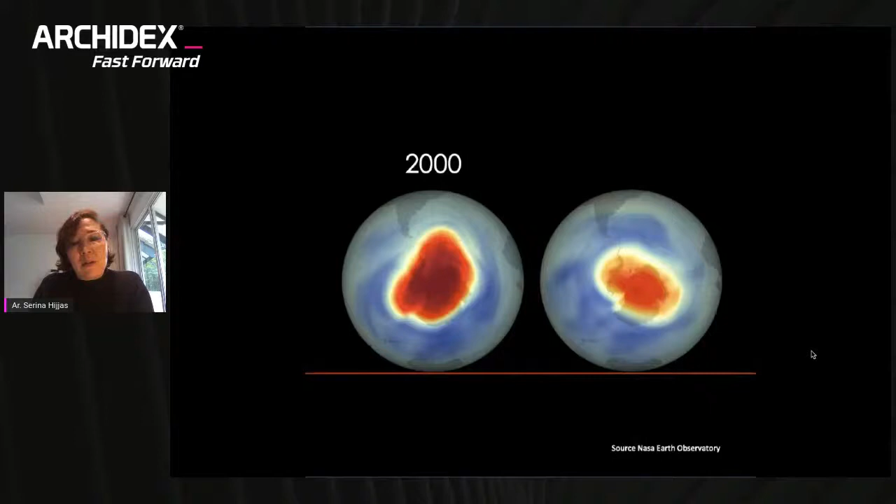I bring these two figures out - an unusual one. Some of you may know that from NASA, from landing on the moon and having satellites orbit around the Earth, we're able to basically monitor the changes happening on Earth. In 2000, they measured that the ozone layer was depleting, creating a hole in the South Pole. What you see on the left is the year 2000.

And what you see on the right is that the ozone hole has reduced, and it only reduced because in 1987 the United Nations introduced something called the Montreal Protocol that banned CFCs and fluorocarbons into the atmosphere. But it's taken us something like 30 years to reduce the ozone hole by about 20%, even from banning CFCs and fluorocarbons. It's estimated that we won't recover till the year 2040.

I bring that up to you because whatever actions we take now will not be immediate. It will take years before we can reverse whatever is happening to climate change and the planet as we sit here. We are already approaching the 1.5 degree limit, and we will see these repercussions through coastal flooding, urban heat island effects, and everything on the planet, including biodiversity depletion, which is already happening.

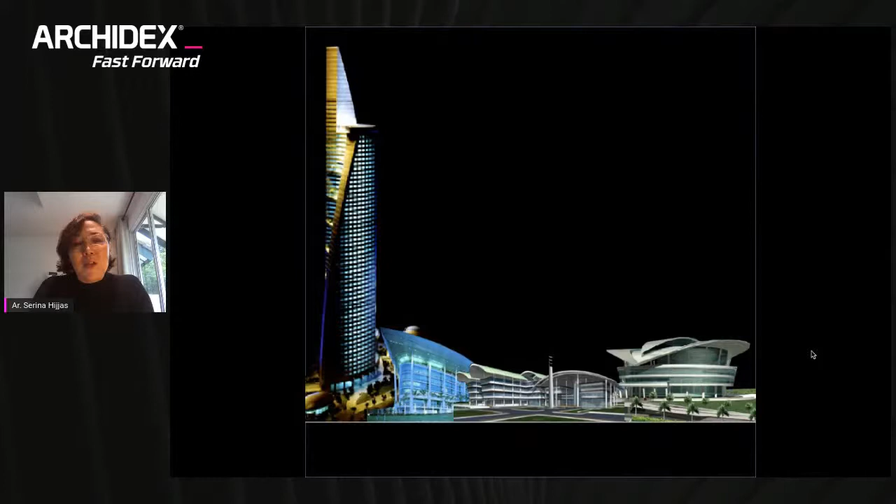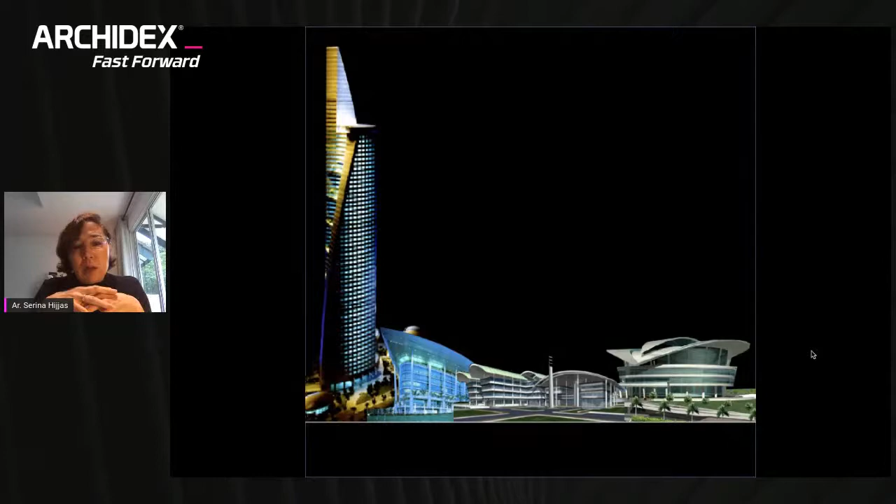So this was one of my first projects, the Menara Telekom. It was the first idea to bring sky gardens to buildings, because I came back with this idea of green buildings already some 30 years ago when I first started. That started a conversation of a series of different buildings - you may see they are similar in form, all curvaceous, from the Telecom building to Securities Commission to Ericsson to the Convention Center. In the lower buildings, they have this sort of big umbrella roof. They were about identity, about environment, and about ways of looking and transparency.

Since then, the buildings I've been involved in have moved and shifted with a lot of the same ideas and themes seen in all these buildings. And the ideas generated in a lot of these buildings - a lot of people will say Hijjas is all about forms.

Hijjas buildings are not just about forms. There's a lot of content inside the buildings and a lot of ideas that you will see later on. But one of the distinct things we like to have in our buildings is a strong silhouette of the building. Because in a strong silhouette, people retain the idea of what this building is about, and that memory is a strong icon in itself.

And it's not about big buildings necessarily. But when you look at a Hijjas building, there is a lot more layering in the ideas that come into play that you don't see. There is a climatic response, there's identity, there's material, there's daylight harvesting, there's energies, there's transparency. Some buildings where we can introduce passive design. There is a scientific approach in some ways to the building facade, but a lot of them are in response to people and place.

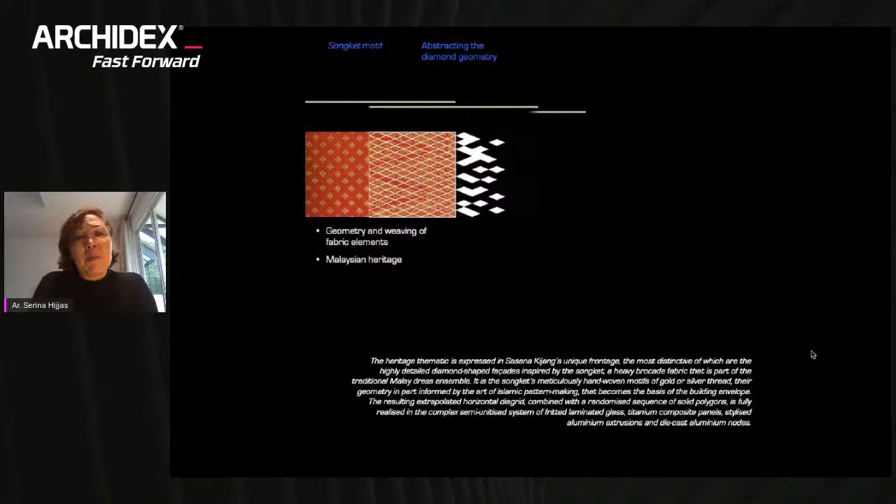The second idea and element inside this building was derived from the heritage of the Kain Songket. The geometry and weaving of the fabric was abstracted into pixelation and diamond geometry, wrapped around the whole building in a series of stone, glass, and even titanium. It's the only building in Malaysia that has titanium on it, which is actually on the museum side.

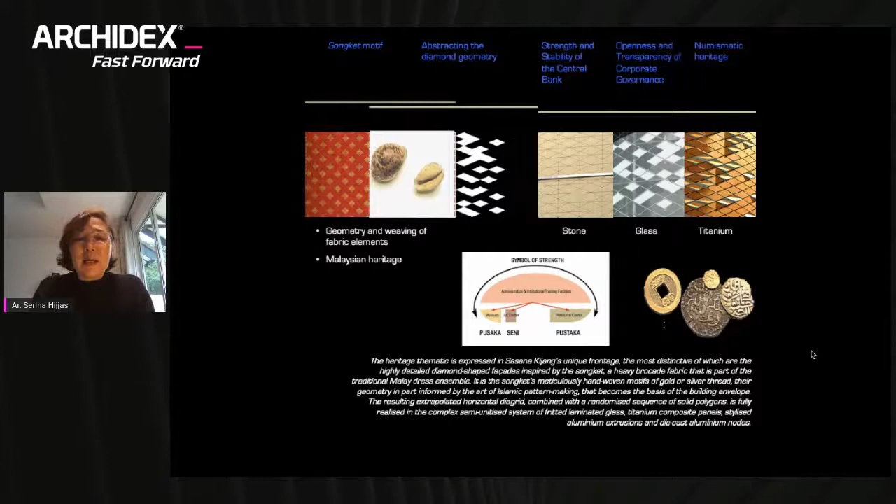This was one of the most complex buildings we've ever actually built. Not many people know that there's 2 million square feet of built up building in this. It's almost two-thirds the height of the Petronas Towers, but done horizontally. It has more than 1,000 car parks submerged underneath the building.

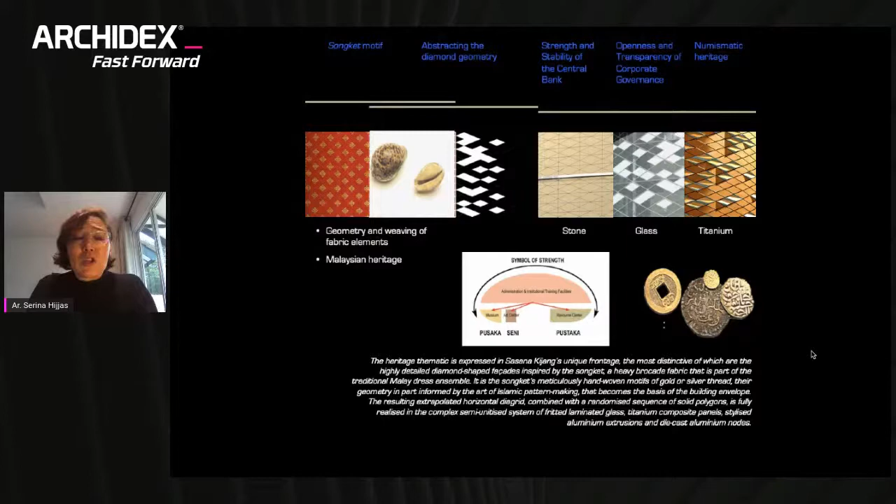What we wanted to give was a sense of lightness and pavilion. The front buildings are a series of three pavilions, Pusaka, Seni, and Pustaka, because of the function of the buildings inside. This is a view of the building. I've got to say that when I said it was the most complex building, it looks rather simple.

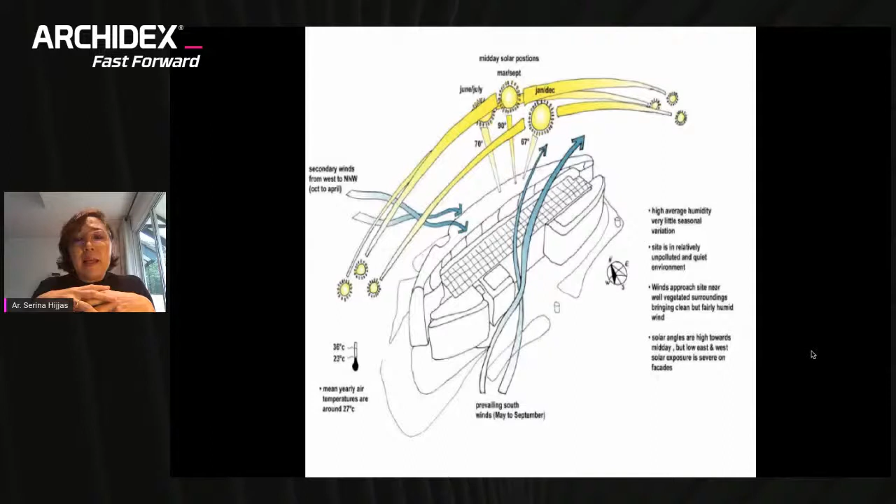But right at the beginning, we looked at the environmental aspects of it and how we brought daylight into the atrium spaces, how we responded to north-south. The building is predominantly north-south, and heat gain is mostly in the east and west. How we wanted to bring light in was also very important. But at the human scale, it wanted to appear very low-rise and approachable.

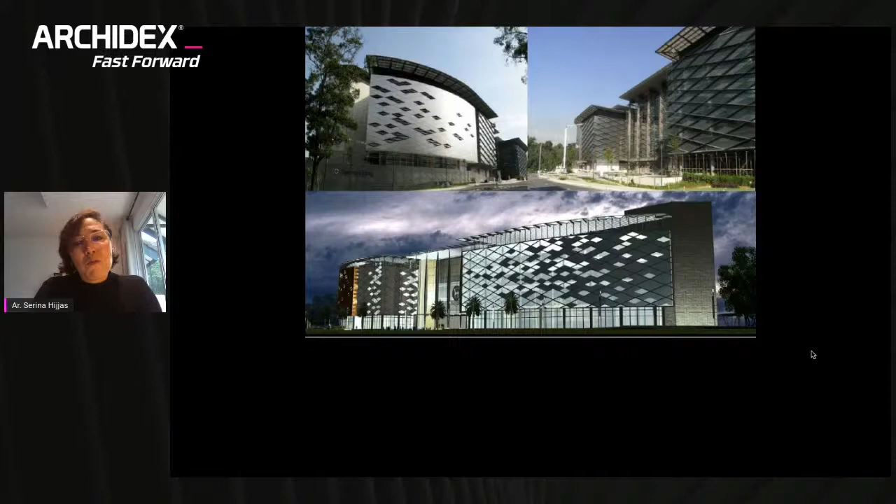The building, whilst it has different components, responds by wrapping a building fabric that is contiguous around, but in the details are quite different. There were more than 22 types of facades on this building. As I said, it was one of the most complex buildings that we had done.

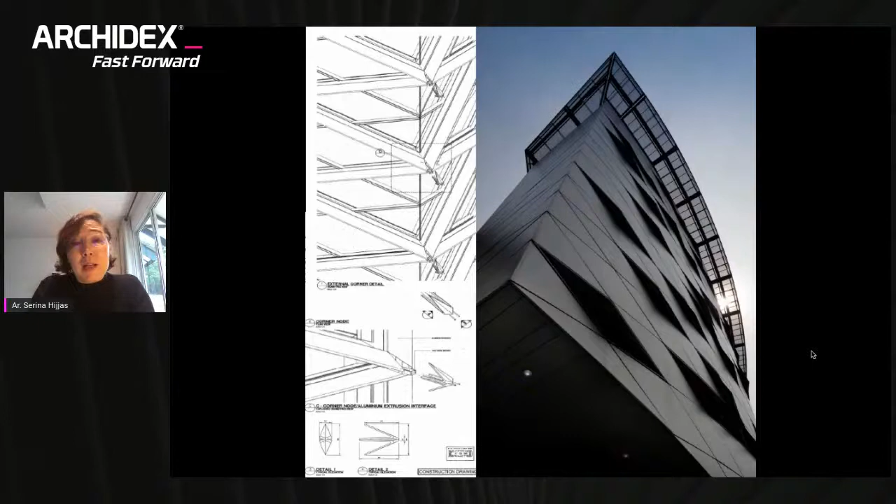From the eyelids onward, whenever we do a design, whatever research you do influences the work that you do later on. So this diamond facade appears again in the tower of 4G11 in Putrajaya, as eyelids on the building. And the Songket also appears in the boulevard of Putrajaya, also done by us, a 3-kilometer landscape planning of the boulevard with a matrix of diamond grids. It was probably something we were very fascinated about, and we adopted it into the building and created something that was quite unique but responsive in the facade.

Often, when we start a competition or an idea, we look at it in a very holistic way, and we also work together with engineers, both MEP and structure, simultaneously. We work in a more collaborative way to get the best out of them, and also generate ideas together with them.

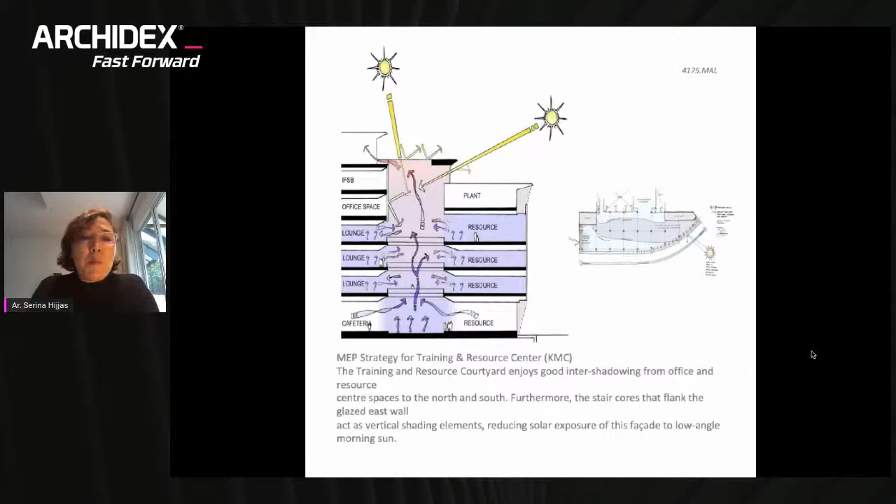So you can see the way the air system works inside this building. As I was mentioning, from the outside you don't understand the layering and the complexity of the building, but there is a whole series of ideas generated inside.

One of them was this continuous Nautilus staircase which spirals up the building. We wanted something dynamic, so as you're at the base looking up, the experience of going into the museum probably came from a memory of the IM Pei building at the Louvre, where there's a huge spiral staircase bringing you from ground to lower ground. But in this case, it's a continuous opening up of a spiral that goes up to the top.

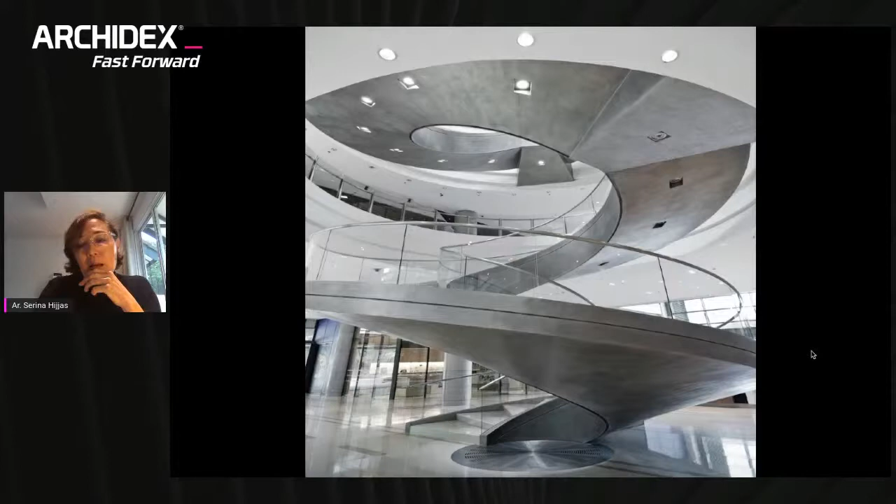So it is not a constant spiral, it's a Nautilus staircase which actually gets bigger and bigger as it goes up to the top. Complex as it is, it looks continuous because we used pewter render onto the building, a special finish because we wanted it to feel Malaysian. That's why you see pewter used for the first time on this spiral staircase going up.

Another interesting building for us, evoking ideas of portability, was the Malaysian Pavilion. It was the first time the Malaysian Pavilion at Expo did not represent a Minangkabau roof. It was a shift, an idea that broke the normal rule, because in all the other expos Malaysia was represented it was always this cultural building that looked like a Minangkabau. In this case, we explored something completely different.

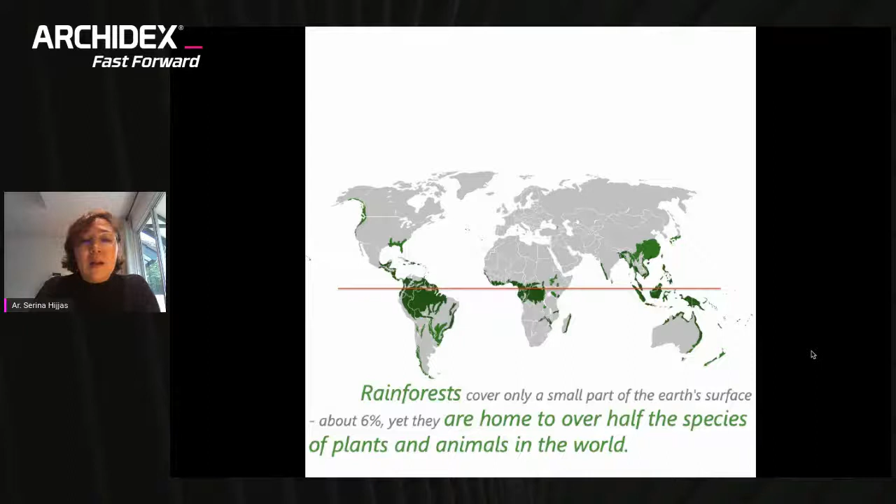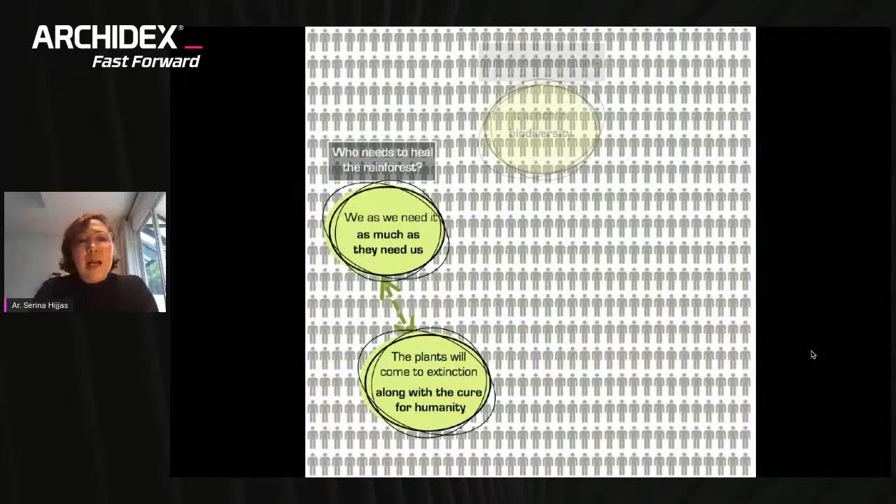So the idea for the pavilion was the seeds from the rainforest as a metaphor, and they were built using timber. The idea was to exemplify the biodiversity and the uniqueness of Malaysia's biodiversity to the world, both for medicinal value at the humanity level and at the biodiversity level. From the humble rice seeds we took this inspiration and translated it into a pavilion, meant to be an experience quite different from normal buildings.

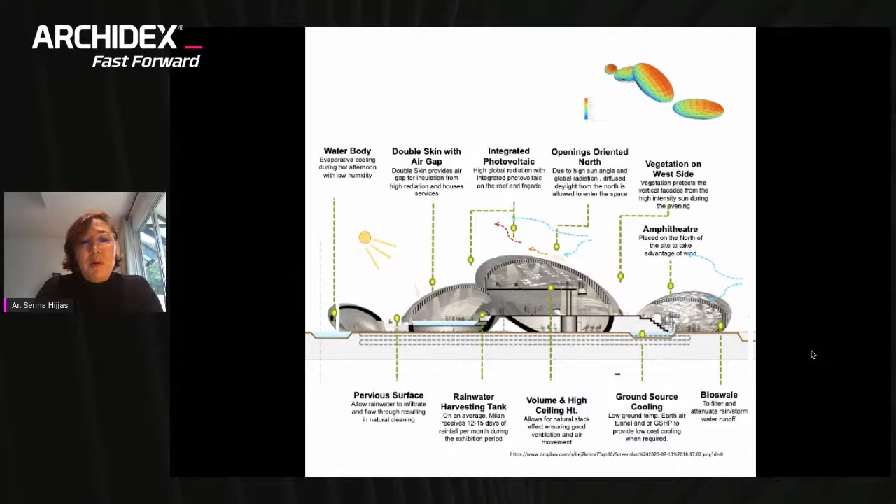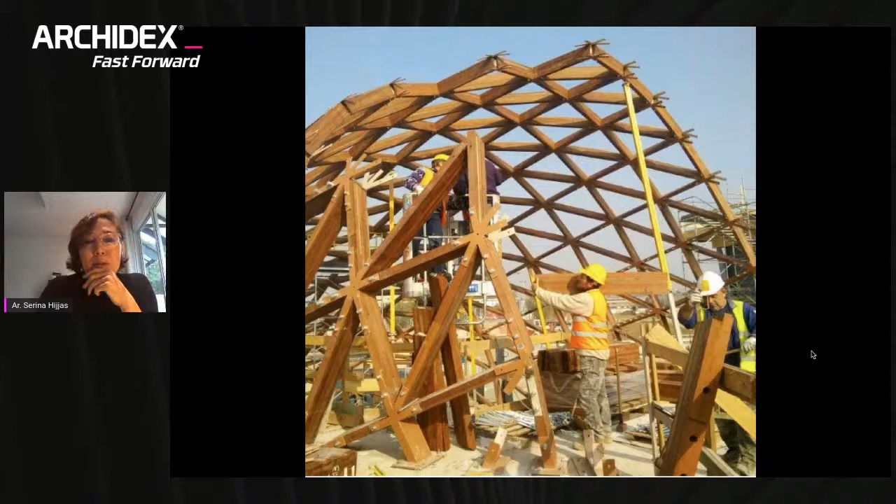At the same time, we looked at the whole sustainability component, from ground source cooling to water collection to the skin of the fabric of the building. It was a very interesting experience because all of these timbers were manufactured in Johor and then assembled by Italians in Italy, making for a very interesting glulam story in terms of building.

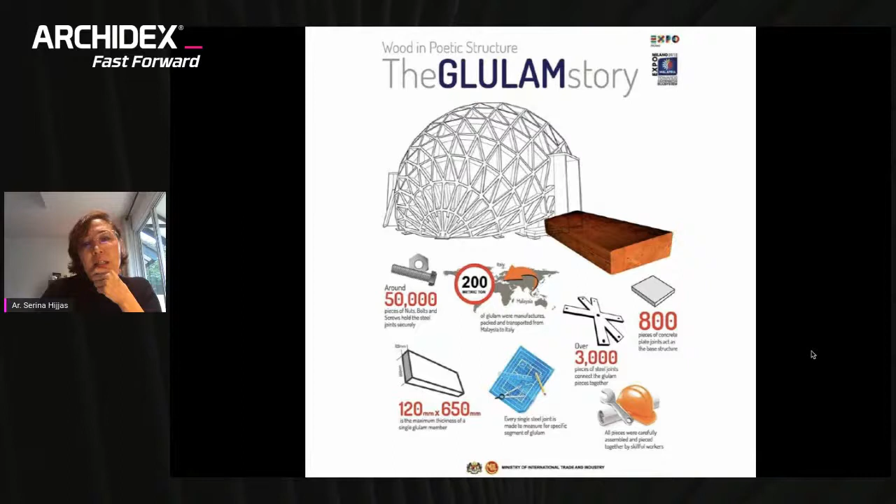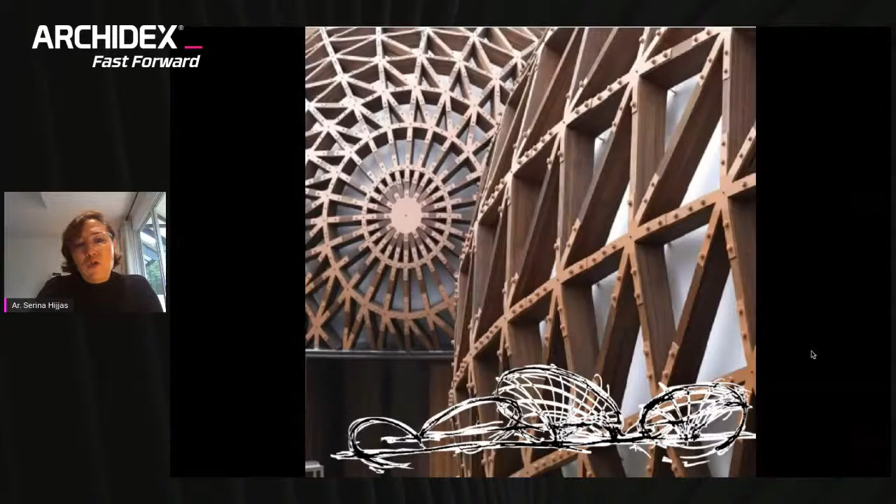I think this was our exploration of trying to showcase the best of Malaysia, both in terms of the richness of that biodiversity and in terms of the materiality. It was one of the best pavilions at Expo, and it really became an inspiration to Malaysia itself—showing that even though we're a small country, we certainly have a lot of interesting ideas.

Both these pavilions were actually competitions, so we were very fortunate to enter the second pavilion, the Malaysian Pavilion. Pavilions are very interesting for us because museums and pavilions are the only typologies of buildings that allow you to express something unique.

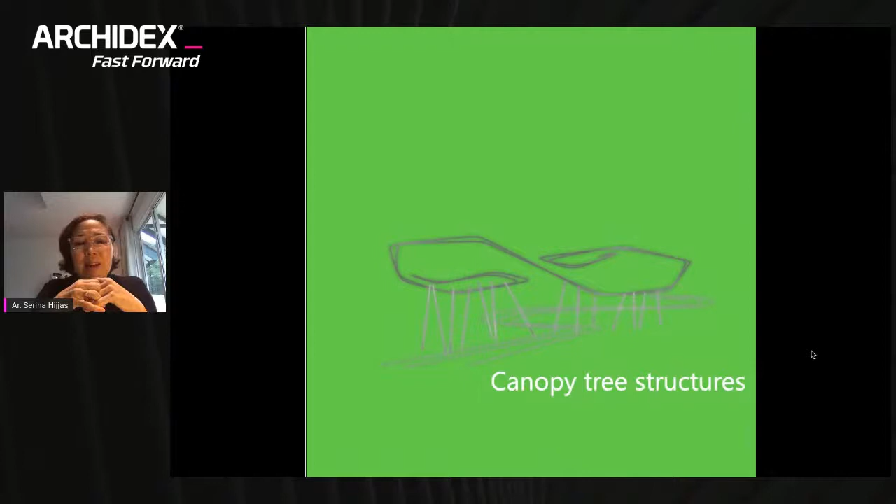You're not going to get that necessarily with housing or definitely office buildings—there are different types of responses you need to take. For the pavilion at Expo 2020, it's still going to be called Expo 2020 but will be held next year instead because of the global pandemic.

We came with a totally different idea in the competition. So all that you see here was actually our competition submission right at the beginning, very, very comprehensive, but again trying to do something that was unique.

In this, we call it the canopy of trees concept, creating tree structures as a Malaysian pavilion. I remember when I went to Italy and they asked where I was from. I said we're from Malaysia, and they said, oh yeah, we've seen the cartoon animation Sandokan, people live in trees, above the ground on stilts. I said I don't know this animation, and it turns out it's an Italian animation about the Malaysian jungle and way of life. So it was very ironic.

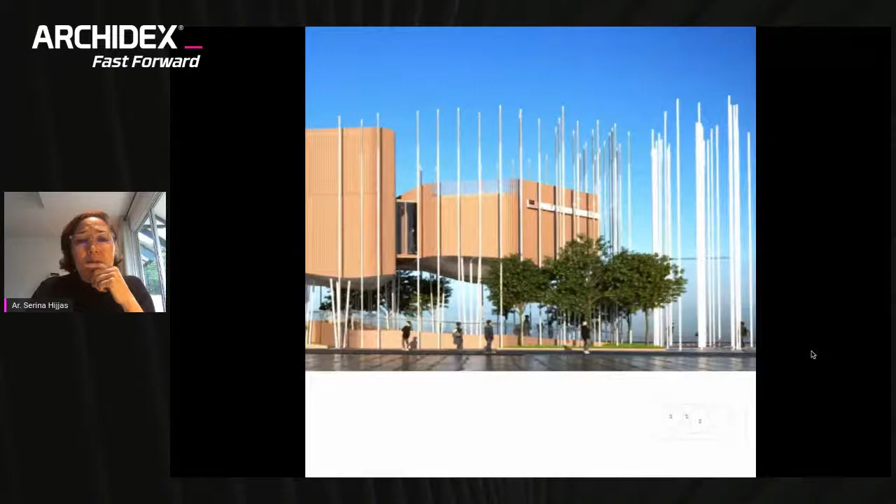That stayed in my mind, that people's perception that we live on stilts. It's interesting because as we go forward, in the event of climate change, for those living by the water's edge, living on stilts may become the new norm, and we'll be reverting back to that. So in this pavilion, the Malaysian building on stilts made of natural materials was one of our inspirations. The experience of meandering through the landscape, unique to Malaysia in terms of our rivers, was an idea that seemed to resonate. This is the Malaysian Pavilion for Expo 2020.

The building is clad and built in steel and timber for sustainability. This will be the first carbon neutral pavilion at Expo, as much as we could do. The idea of the building is touching the ground lightly, so the experience of the groundscape is as important as the experience of the pavilion itself.

We developed this idea because we were getting a lot of criticism globally about palm oil and reforestation, and not many people know that Malaysia does a lot of reforestation and sustainable palm oil. We wanted to showcase that in some form, making a sort of political statement as much as a pavilion statement. So it's an integration, a lot of pavilions about an experience inside.

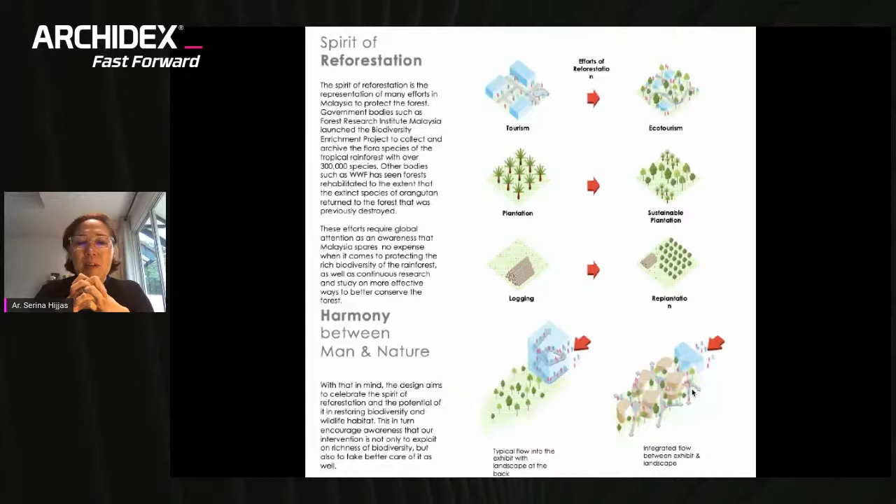Quite interesting, because the Singapore Pavilion, which is obviously going to be our competitor in the tropical belt, is also lifting off the ground, but theirs is a single platform pavilion, and the experience of walking up through there is also an experience, and inside it's actually quite green.

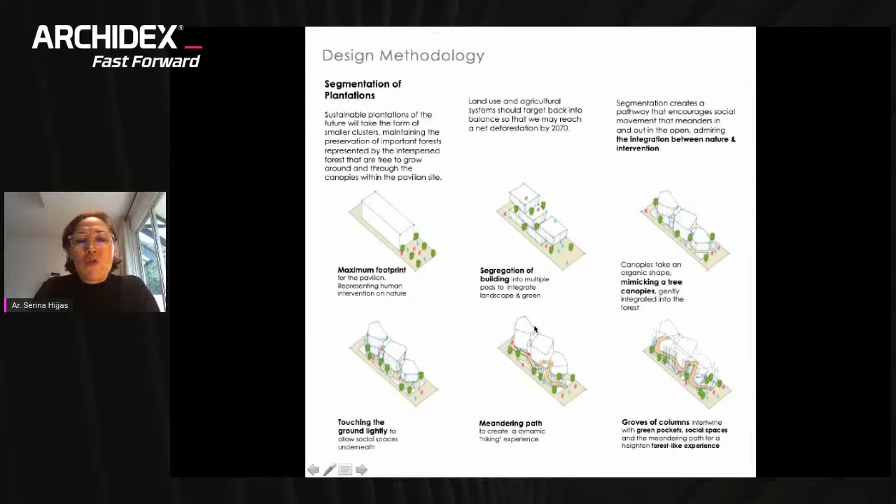So this was some of the design methodology: do we maximize the building on the land? Do we stack it up differently? Do we mimic the tree canopies? And how do we get the experience of a meandering path up the building as part of the whole pavilion experience? This is a section through the pavilion showing that the exhibition itself is above ground.

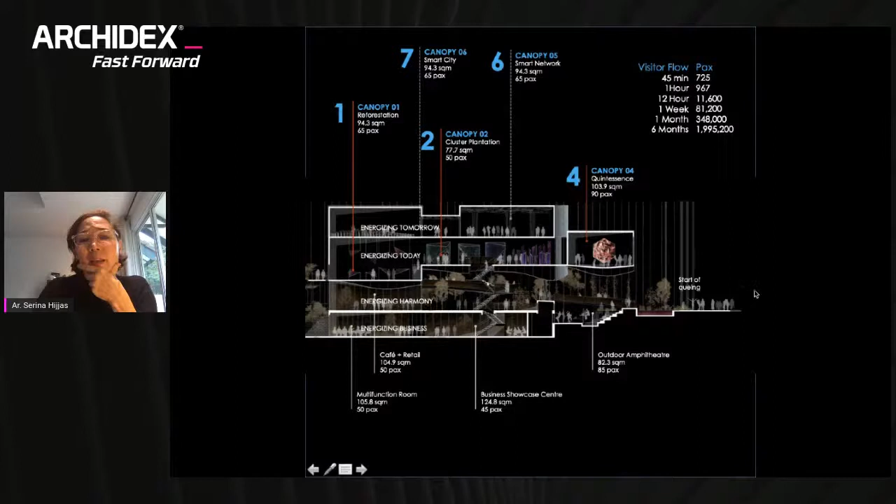Part of the below ground is also an outdoor experience, with eating areas, and the queuing experience and walking up the ramp is part of the entire experience. And then when you come in, what will that experience be?

As mentioned, it's going to be the first carbon neutral pavilion. We obviously maximize as much as possible on solar panels, but that only generates about 20% of the energy. So part of achieving carbon neutrality is that we are going to be growing and reforesting trees in Malaysia as part of the carbon exchange, because we're limited in the amount of space we can build.

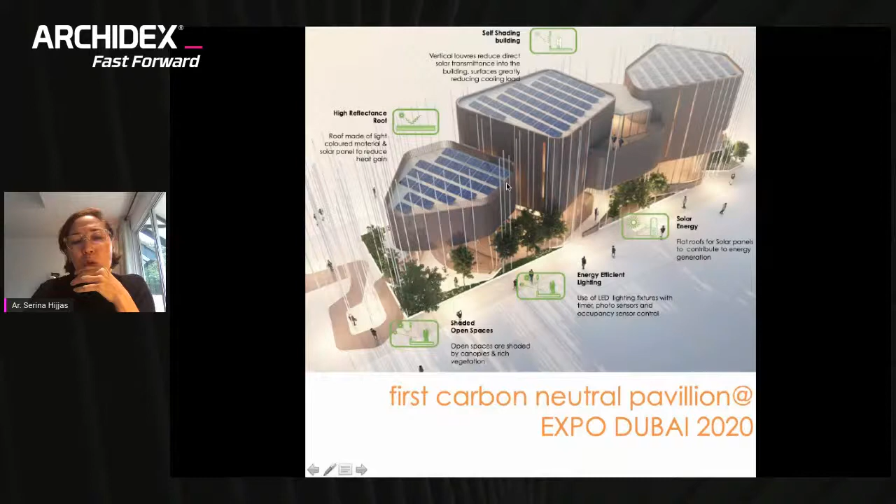So we've maxed out completely with regards to energy efficiency and solar. We also have heli fans to scoop air into the place. We've done as much as we could to optimize the building itself.

This is the experience of people, how they ramp up into what is the white box experience of the pavilion, into the black box experience of the pavilion.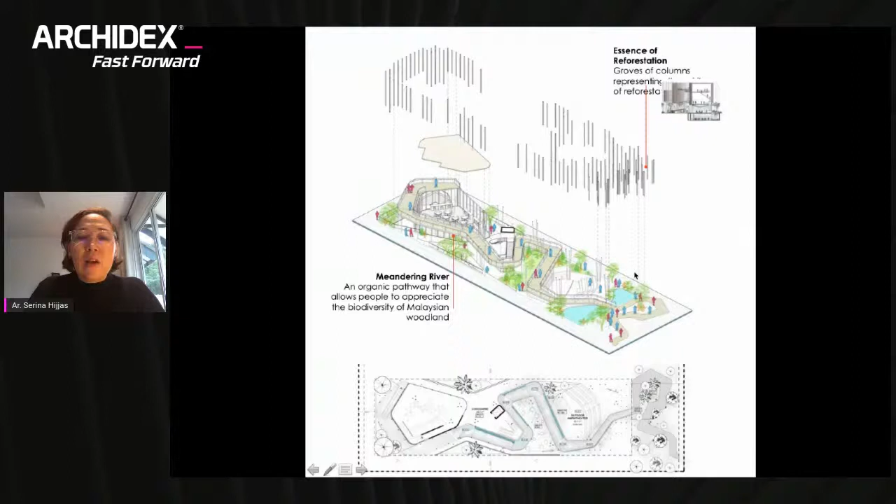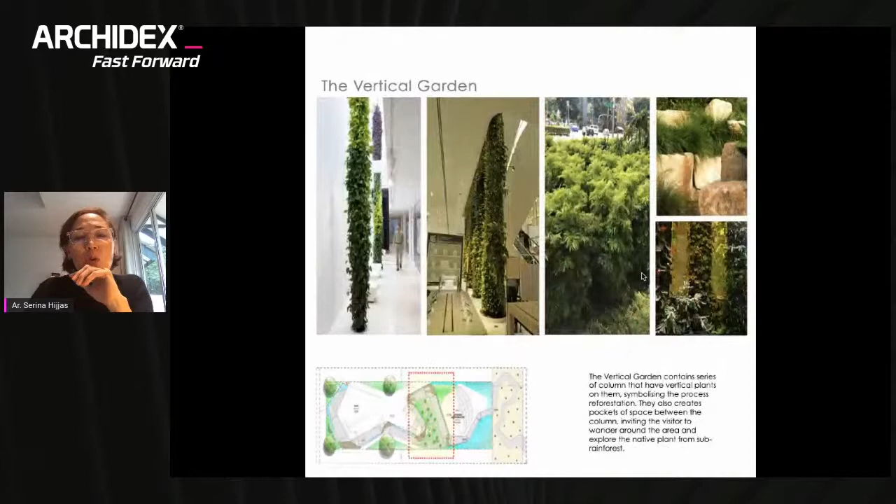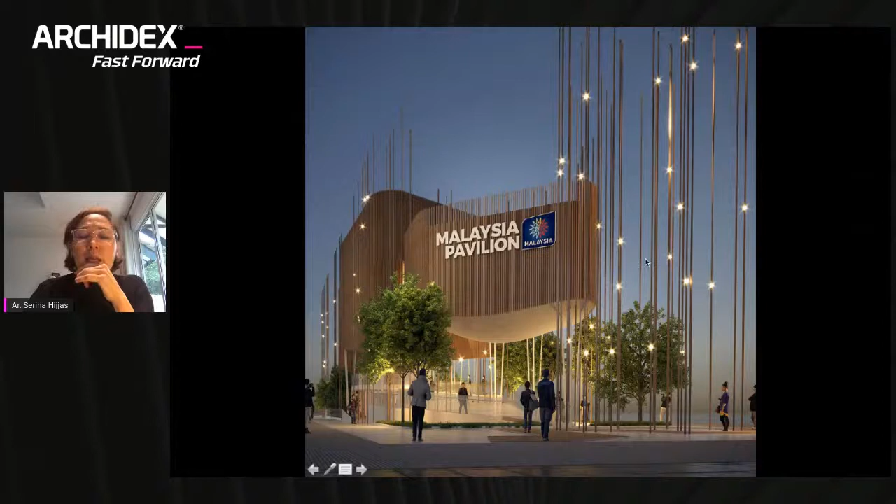And the columns that you see around the building — we've also introduced a water rill, so it's the sound of water running down the ramp into a water pool, with a series of vertical greens and courtyard greens to bring light down below. The poles that you see here will actually move a little bit because they rise quite tall, and the lights on them are a representation of fireflies, a symbolic representation within the pavilion landscape itself.

Not many people realize that daylight is free energy. It's something we enjoy in the tropical belt because we get 365 days of 12 hours of sunshine every day, apart from rain. This is quite different from living in London or New York, where daylight hours change between 7 and 3 and so on. So we're in a unique place to optimize that, while realizing what other ideas exist. This building about free energy is the new Celcom Tower.

I don't know if you remember before, some of these buildings used to have a Celcom building, the old Celcom building, which used to say 'Welcome to Celcom territory.' And they used Usain Bolt as one of their ads in terms of speed of connectivity, providing speed of connectivity to people. So Usain Bolt's ad came after the building.

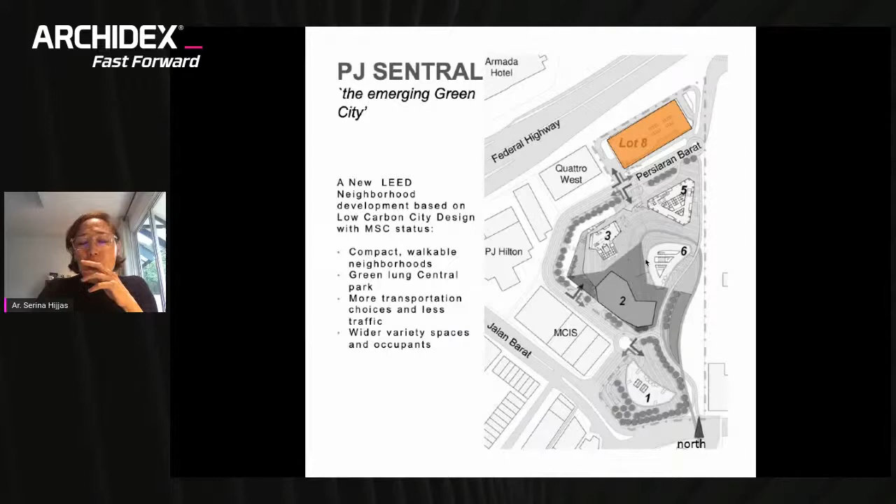But when we were developing the idea for Celcom Tower, this was before the co-working space came in, and we were looking at distributed work options, teleworkers, satellites, moves to mobility, change of use, where basically they don't work at their desk. So it was an emerging idea, but this is fully taken into this building.

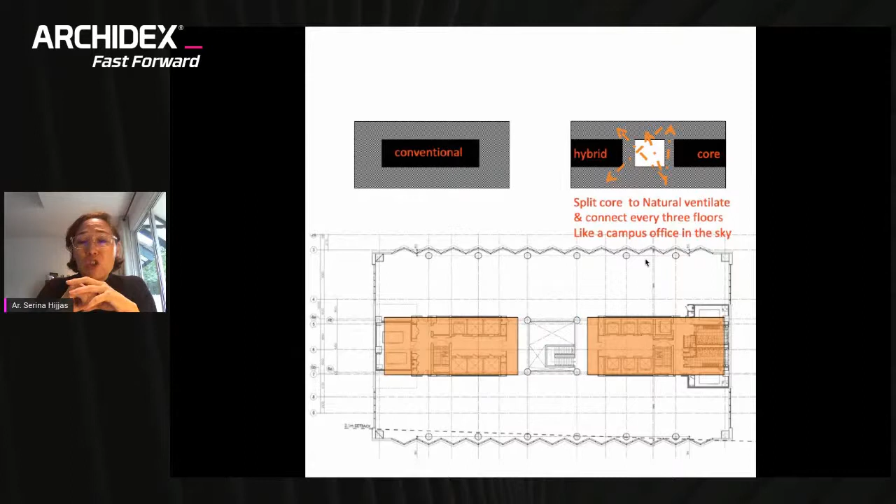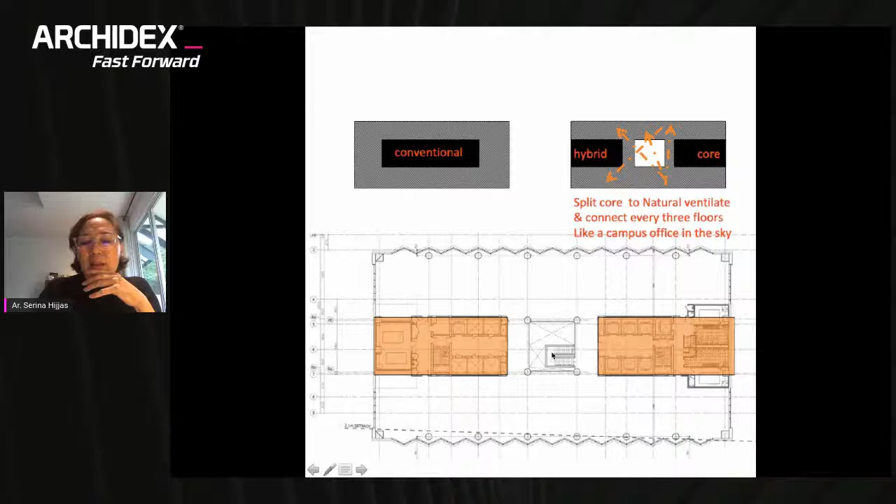The uniqueness of this building is instead of getting a central core, conventionally, we move the cores to the side. That allows us to ventilate the toilets going up naturally instead of mechanically. It also allowed us - and that was the main idea of the building - to connect the building every 3 floors internally by a mini atrium space. So it's, I would say, a kind of hybrid type of core, which was the first.

And originally, the building had all these cross braces going up the building. But as a process of designing the building and working with the developer, some of these things get value-engineered out.

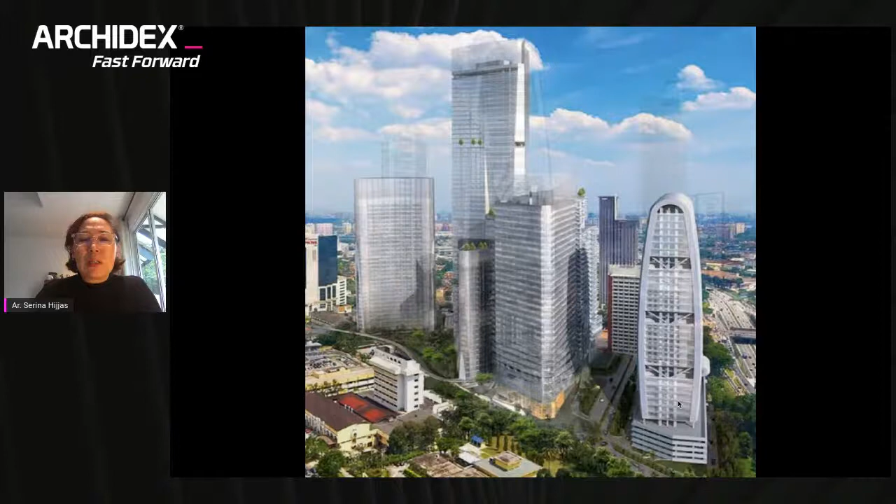This is the building itself. So whilst it looks like a totally clad glass building, in fact, on the northeast and southwest sides, where you get a lot of heat gain, it's actually predominantly solid where the cores are. So it works in terms of the passive orientation.

When dealing with daylight as a free energy, you have to be careful about glare. In the Malaysian context, we get a lot of glare. So the learning experience from here is that when we were designing the building facade, I basically said to the facade engineer that worked with us, when we touch the glass, I don't want to feel the heat of the glass. I want to be able to touch the glass and not feel it's so hot that I can't touch it. So that was one of the ideas for the building.

This is the look of the building. Obviously, Celcom, my territory, wanted these LEDs at the side so that they could actually do their advertising.

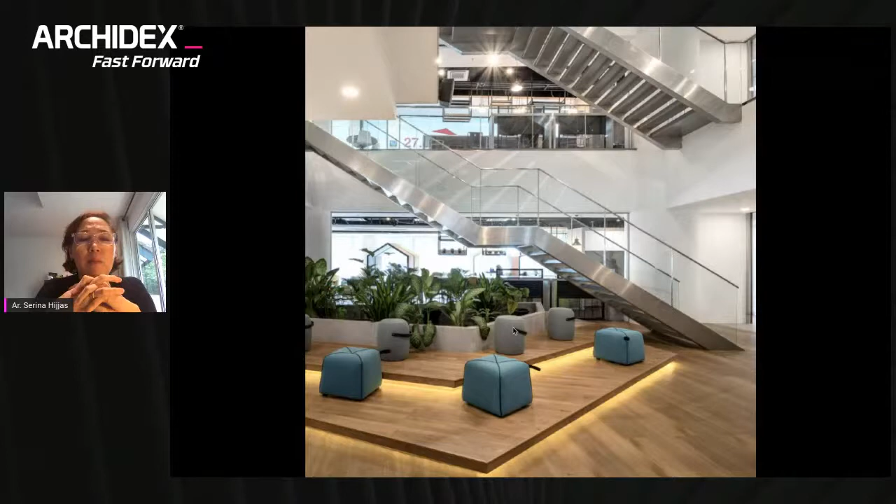This is the 3-story atria spaces that connects between the office spaces. And it is completely table-free in the sense that people can move and work wherever in this space. There is not a fixed desk situation in this building. So it's definitely adopted a very new way of working.

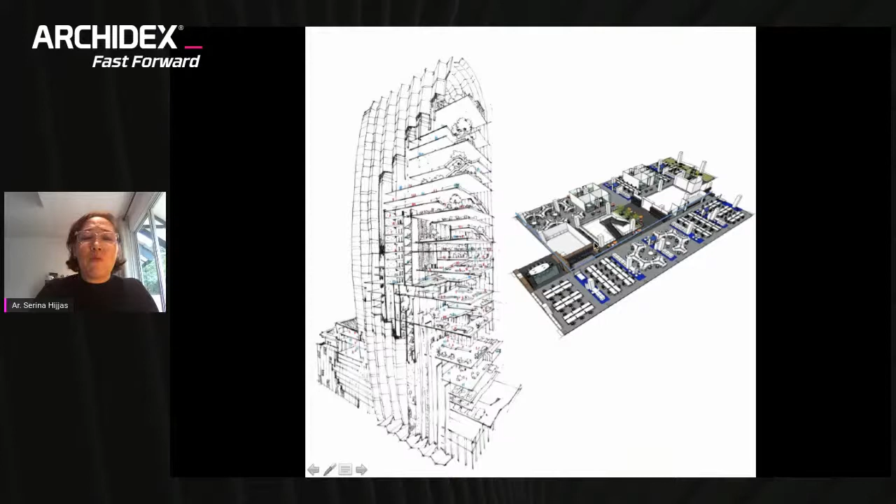So I'm showing you the section because it's how it's connecting internally as an office building rather than just connected by lifts. It's connected by staircases, so departments can move in and out from one space to the other. A little bit of a detail.

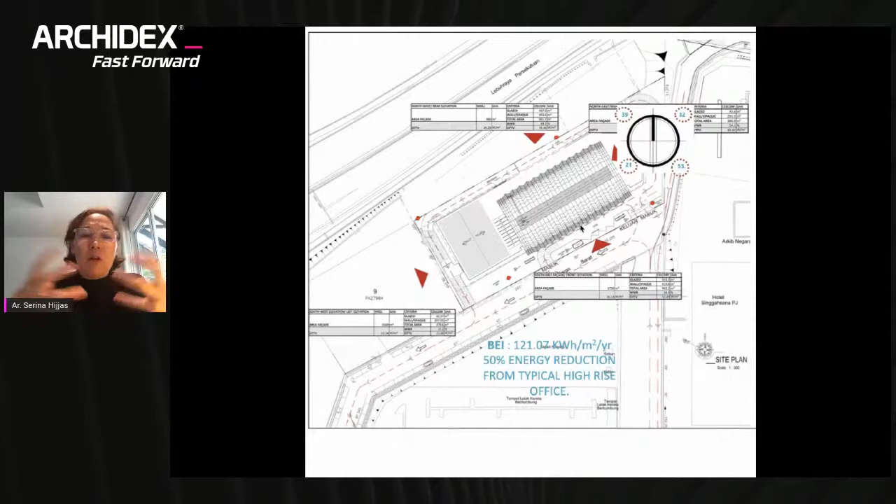This building performs at half the energy of a typical building, even though it is a glass building. In terms of OTTVs, it's very interesting to look at because this is the north and the south. On the southeast, not all facades get the same amount of heat into the space. The OTTV for the glass on this side is actually 53. On this side, which is all glass, is 39. On this side is 32 and 23. So on the sides that are more solid, we're getting a better performance on the OTTV. But you can see that even though it's glass, depending on orientation - and that's why the idea of, if possible, passive orientation of the longitudinal facades to the north and south will make your building perform a lot better.

This is the building view. Creating spaces for people horizontally and vertical living has been an idea that we have been studying for some time. How can we change the mindset that we need to live vertically only for low-cost housing to get the density that we need? And how can we create more community livable spaces moving forward and future-proof us?

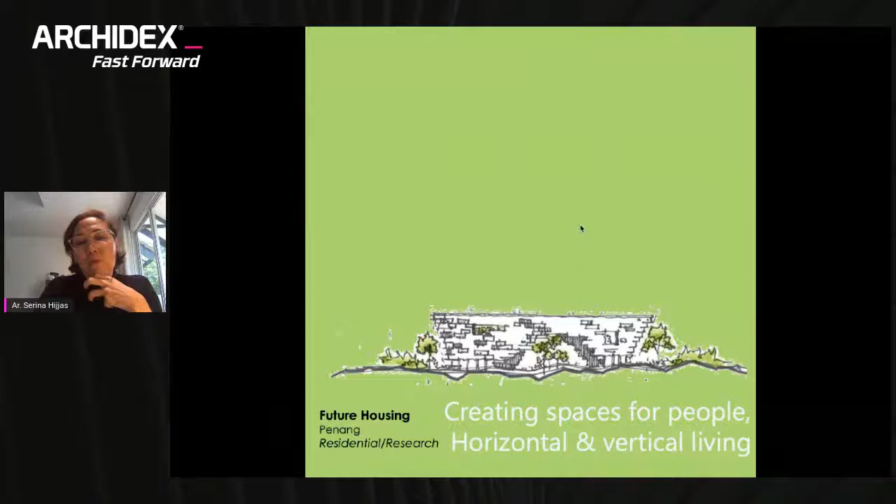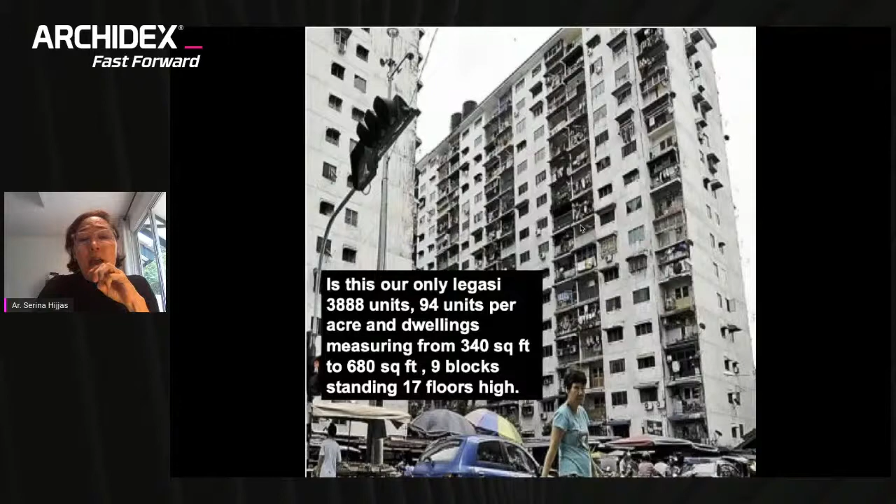And so this is the legacy that we have moving forward. In fact, if you go on the MRT road around Kuala Lumpur, you see a whole series of these huge developed high-rises. I feel that high-rise for low-cost or medium-cost living isn't the best way forward because they don't have the space and they are not connected to the ground.

But at the time when the Rifle Range towers were going up in Penang, and we used to have the same here called Pekeliling, the normal dwellings were very, very small. We would have something like 3,888 units over 17 floors. And we just have to ask ourselves, is this the future that we want? Or is there a more humane livable approach to densification of our cities?

So we made the study for the competition, which I'm sure a lot of you entered, but we didn't. We lost time working on other jobs, so we did not enter, but we did exhibit this idea.

We went around Penang and had a look at the densification that has moved from 78 units per acre up to 244 units per acre. So in just the last 15 years, we have moved from this to this.

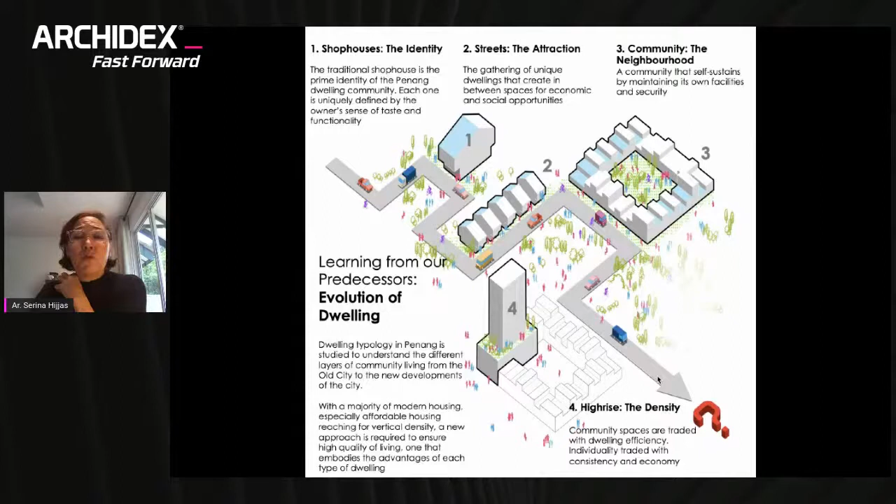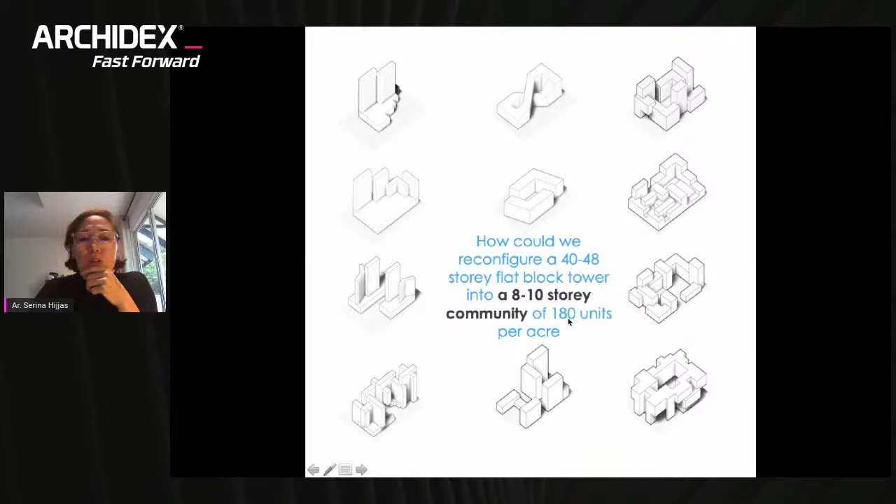One of the main examples that probably inspired us from the beginning was this building by Moshe Safdie, called Habitat 67. And we thought if we could recreate something like this, but turn it upside down.

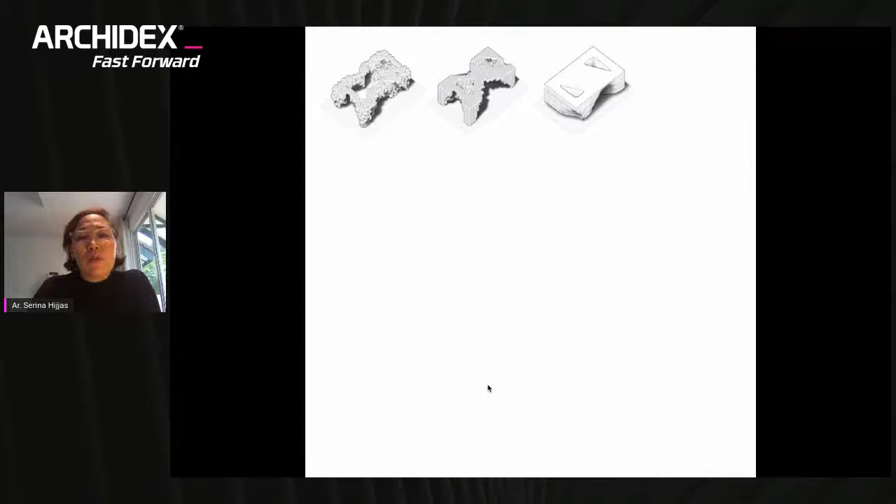Because we need to create a canopy to protect us from the tropical sun, but we could also use it for planting, for urban agriculture, and for solar farms on top. So we turned it upside down and developed something more responsive to this environment with a big umbrella canopy roof.

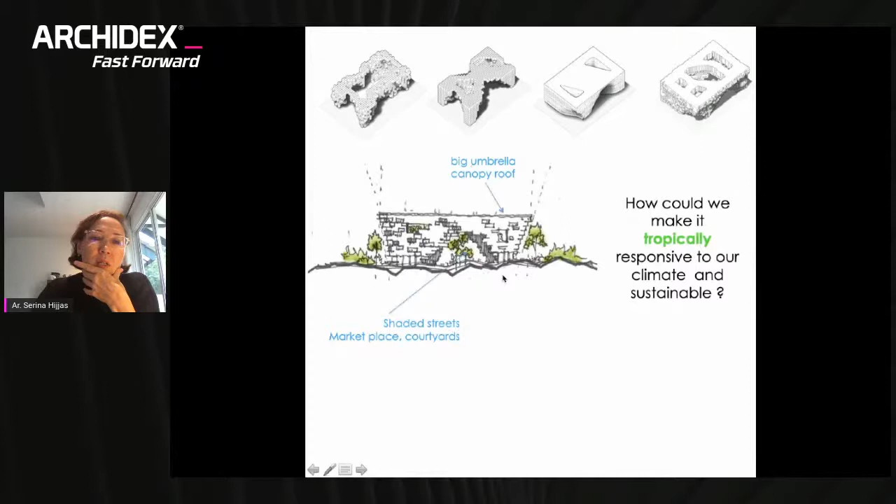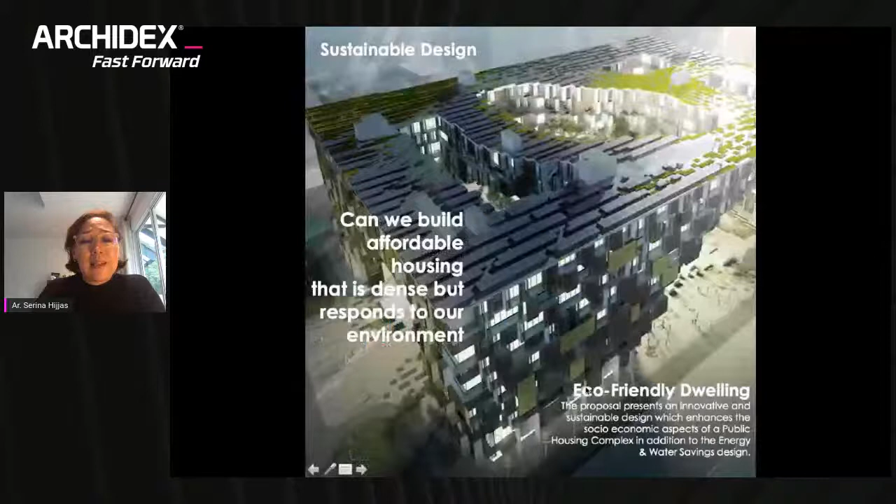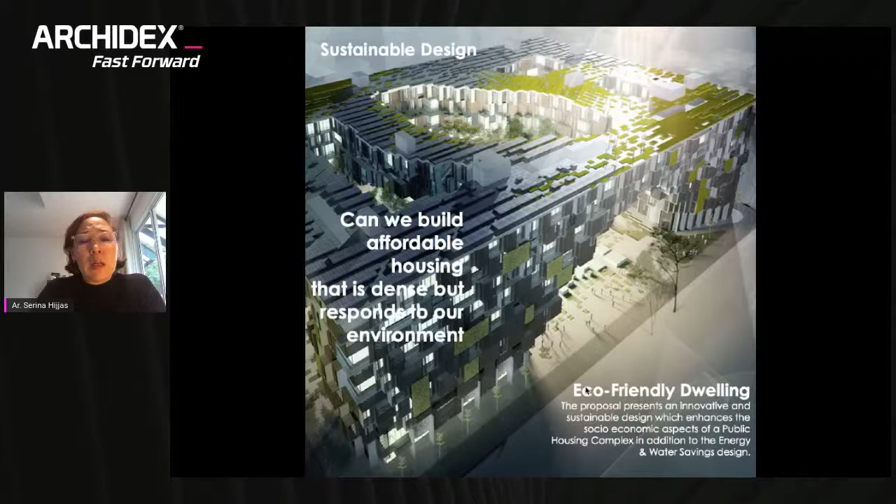When you angle the facades, you manage to get something at 15 to 25 degrees, and it's self-shading. This was our idea of getting 180 units, but creating something more grounded, and scale-wise gave all the enhancements of living in a community.

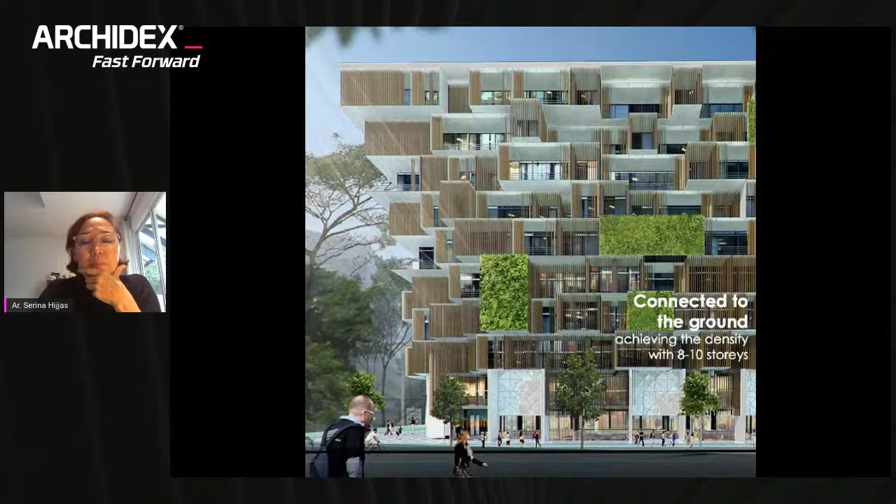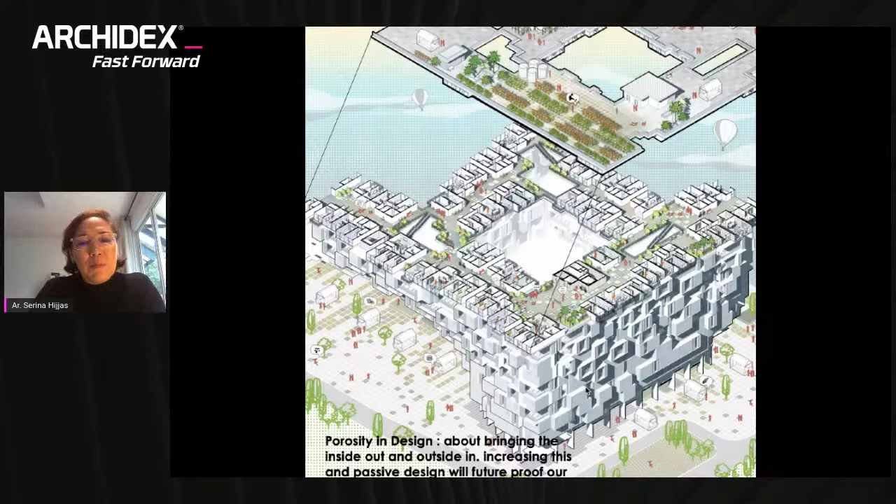Call this porosity in design, because it's bringing the inside out and the outside in, while protecting us from rain and sun—a more breathable design, I would say.

The next building is the Courtyard Campus. I don't know if you know our Heriot-Watt building in Putrajaya. It's a large green roof that curves all the way up, and in phase 1 and phase 2 will come down to the ground as the campus capacity grows. That idea was basically part of greening Putrajaya, continuing what we call the green continuum, which Putrajaya, being one of the greenest cities in Malaysia, is what we wanted to express.

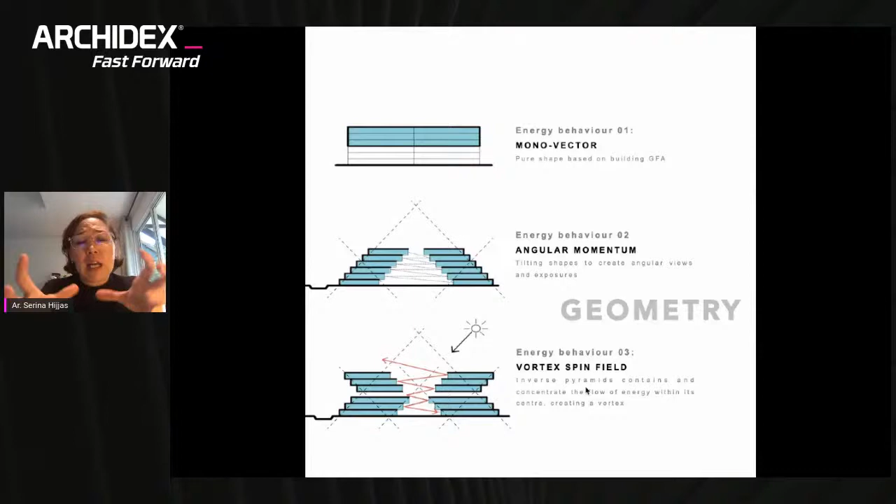The way the garden works inside is like creating a series of gardens that spin like a vortex inside that space. So the building has research labs at the bottom and teaching labs at the top. It has a central garden that goes inside the building, so it's actually quite unique in that way—that garden is like a green vortex inside the space.

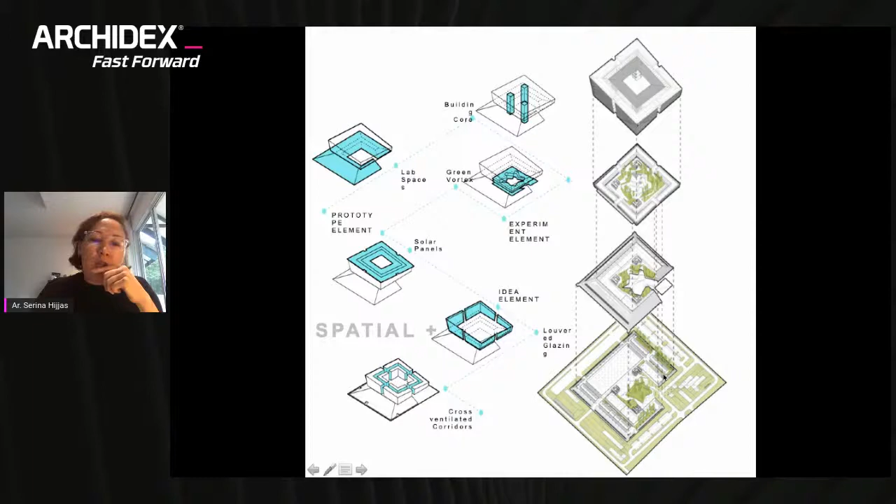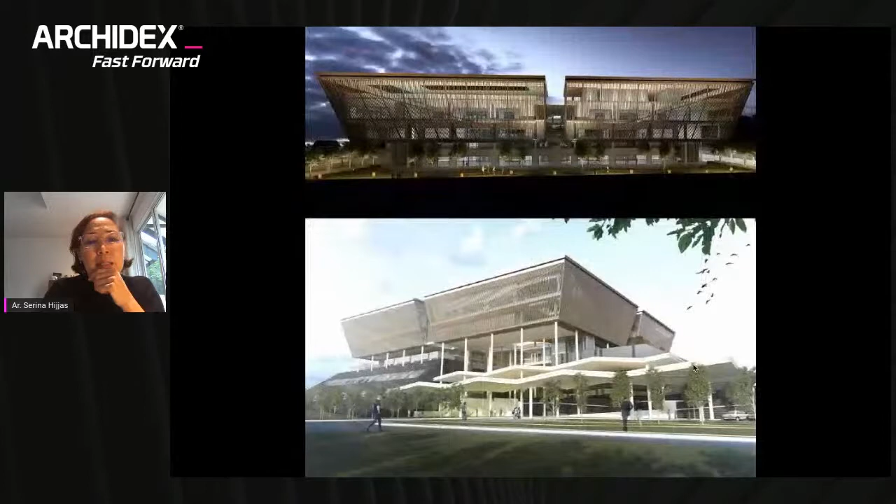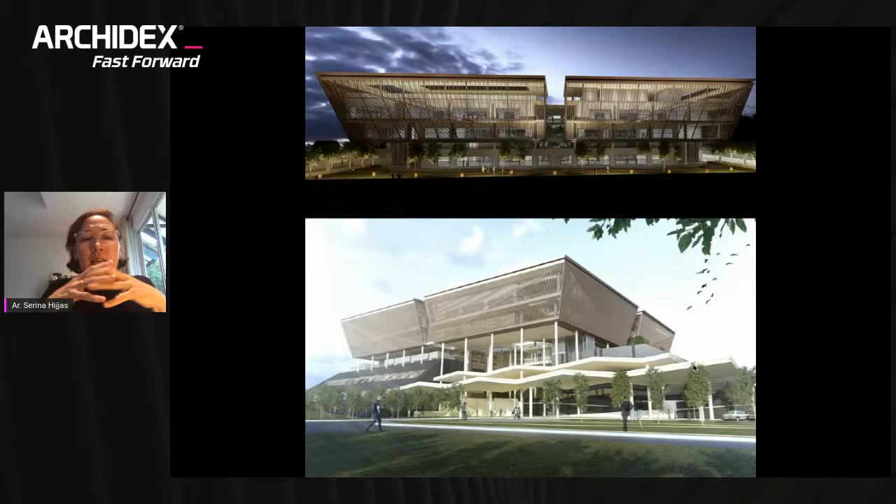It's a very interesting building, and I'd say it's probably inspired slightly by the COE building, the Waste to Energy Research Center training center, a smaller building we've done in Seremban. But this is on a larger scale, so I think it's going to be quite an interesting building. The facade fabric shades the inside teaching spaces, creating a sort of lattice skin around the building.

Most of us, and I think you too moving forward, will probably be looking more and more into competitions. Most of our projects are won through competitions—not necessarily like the last one we're going to show you later. A lot of architectural work is through competitions, and it's interesting for us because competitions give us the opportunity to do research, and that research informs us later in the design of the buildings we do. In this one, we sometimes do an international competition.

We did a library in Dubai, which we came second place for. In Kazakhstan, we came second place for the Kazakhstan president's building, and third place for a mosque in Kazakhstan. So it's not necessary that we're going to make number one, but it is a lot of work.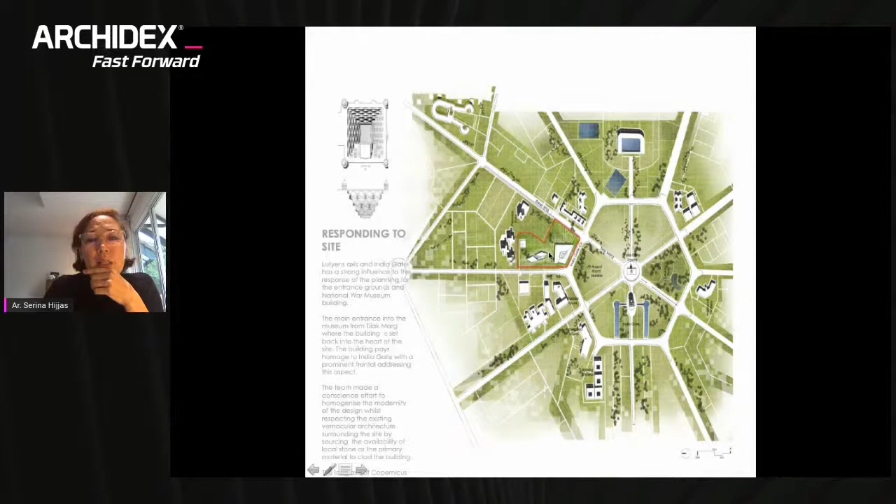This war museum was more about building underground than above ground. We wanted to maintain all the greenscape and old trees and create the experience of the museum underground. This is the entrance building, and the basis of the idea was the Chakravyuha formation, which is a maze formation used in traditional wartime to capture the enemy. We thought that was a very unique idea to bring into this building.

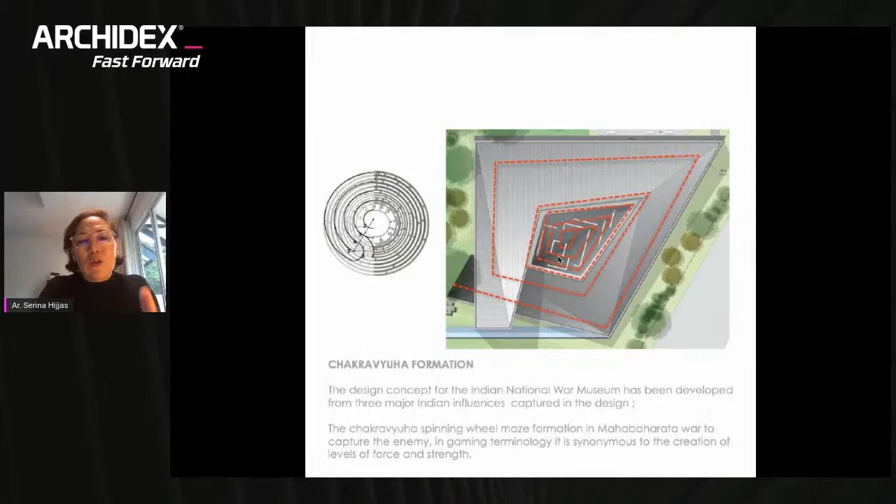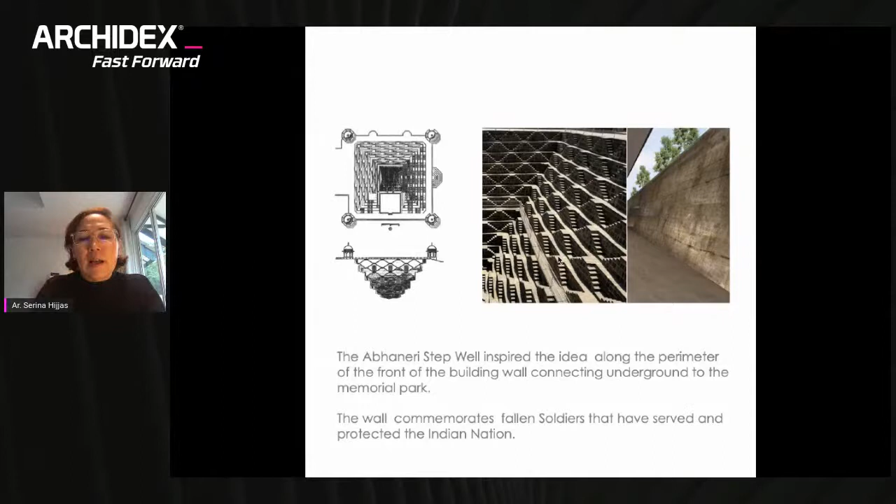But instead of being a circular chakra, it's a different form of chakra. In India there is a very famous Abhaneri step well, an underground step well that collects water but is also a palace. Building underground, we thought that was a nice analogy for creating the space underneath.

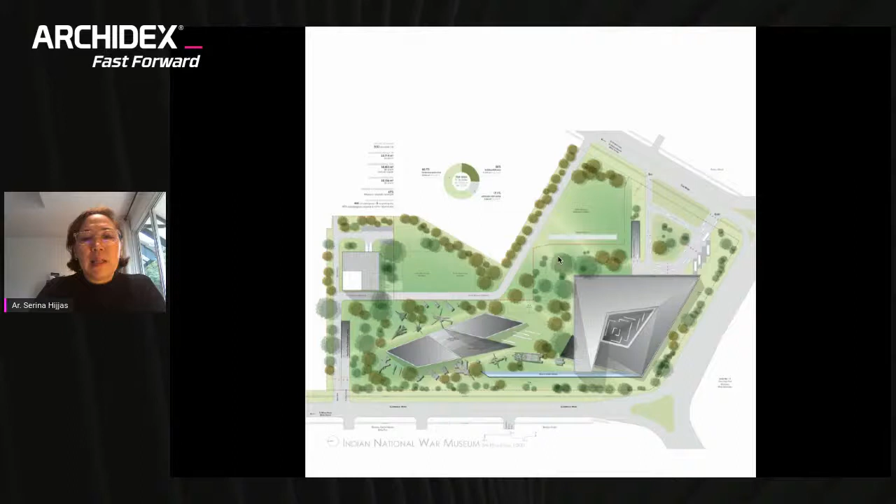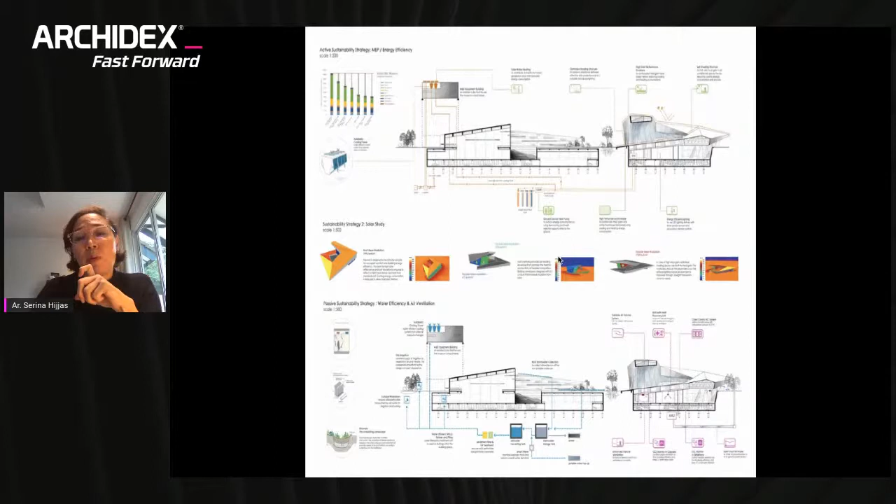So some of these were the concept diagrams before we started the building. You can see we completely did the solar studies and environmental impact of this building for the competition. In this case we're using ground cooling, because in that climate we can actually get good use of ground cooling, which is more effective than in a tropical environment. So you have to respond both to the culture and the environment when designing the building there.

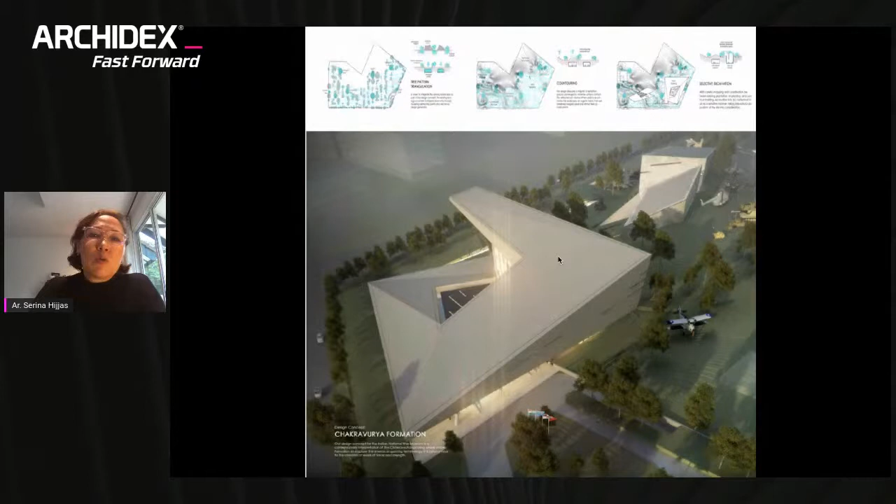These were the pop-up structures, basically looking like bunkers built in war to protect people, with only slits to look out. This was brought into some of the pop-up buildings that emerged out. Unfortunately we didn't win, it was won by an Indian architect, but they've not moved forward and built this.

Lastly, Adriata said I should present the biodiversity project. So what were we doing in lockdown? We were developing biodiversity for Penang South Islands during full MCO and RMCO, working from Kuala Lumpur in collaboration with BIG in New York, Denmark, and London. The time zone was crazy - we were working until 12 at night our time, and they would be working until 3 a.m. their time just to develop this.

I've got to say, it is one of the best collaborations we've ever done. Working with BIG we thought would be very daunting, but in fact it was a full collaboration experience, and for us it was quite unique.

I know there are a lot of comments about the idea of biodiversity. The approach we took for this has another series of layers to it - it was an event to celebrate the biodiversity we have in Malaysia, and at another level going down, to create a net positive master plan for the new islands.

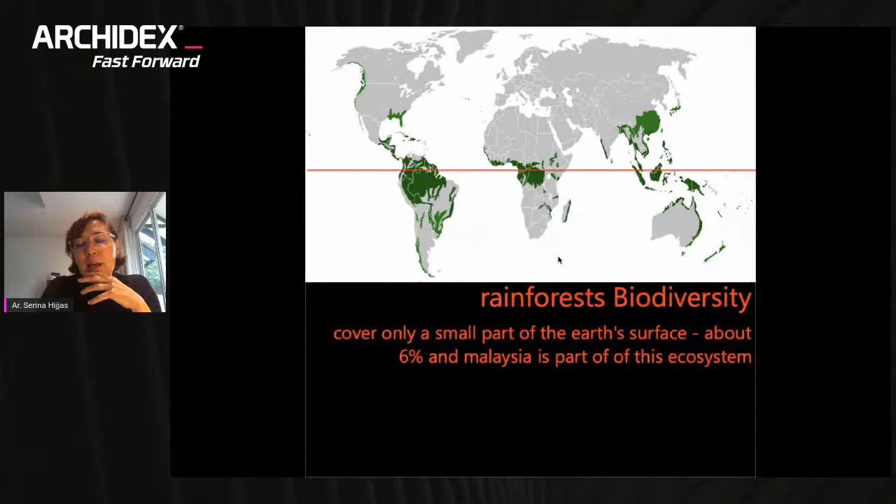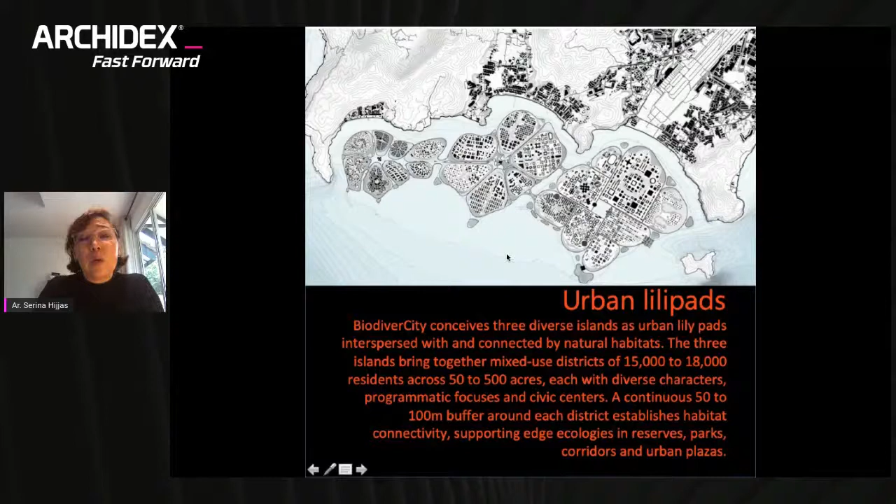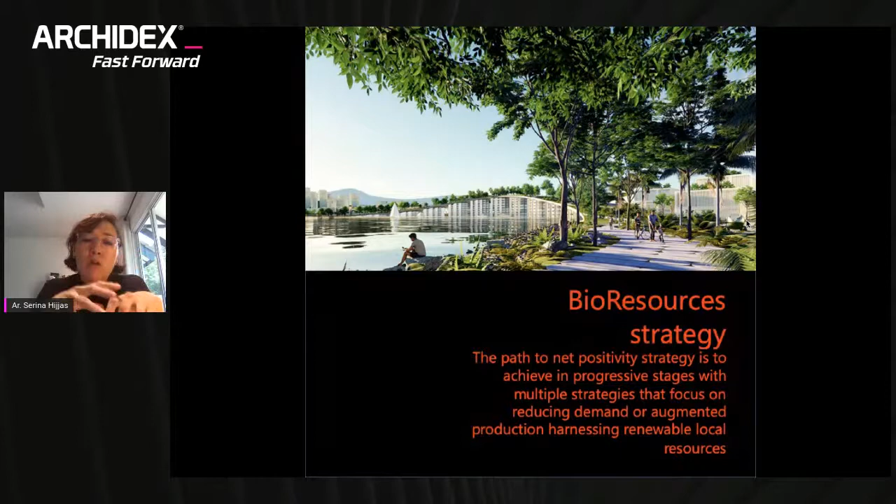So I come back to finishing, and life on Earth and possible life on Mars. I don't see the fascination for life on Mars. I appreciated the competition last year on Life on Mars, which was won by one of the guys who works at Hijjas. But more than anything, this painting, which I've heard has appeared on other people's presentations, tells me a lot about what we are missing out on.

This is a painting by Ibrahim Hussein, whom I knew as a child. I was given one of his paintings - he was a very funny, dynamic painter, one of the best Malaysian painters. He painted this just one year after the first man landed on the moon. He said that right at that time, on the 13th, when they landed, this is my father in Sungai Limau Dalam, and from his view is rice fields and rambutan, durian, pisang. From the view of Buzz Aldrin, the man who did not step off but was visualizing the first step - he was one of the first astronauts, the famous namesake of Buzz Lightyear - his words were 'magnificent desolation,' describing the view of the moon. So in the painting, Ibrahim shows that in the view of the astronaut as he arrives, he's basically seeing life on Earth, and in the magnificent desolation of the moon, you really want to be back on Earth.